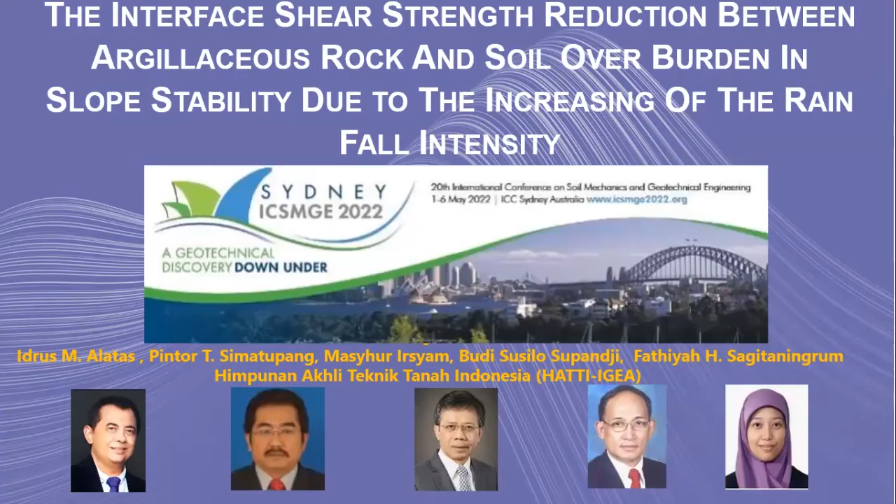Hello, everyone. Thank you for giving us the opportunity to deliver a presentation with the title The Interface Shear Strength Reduction Between Argillaceous Rock and Soil Overburden in Slope Stability due to the Increasing of the Rainfall Intensity. This paper was prepared by Dr. Idrus, Dr. Pintor Simatupang, Professor Masyhur Irsyam, Professor Budi Susilo Supandji, and Fathiyah.

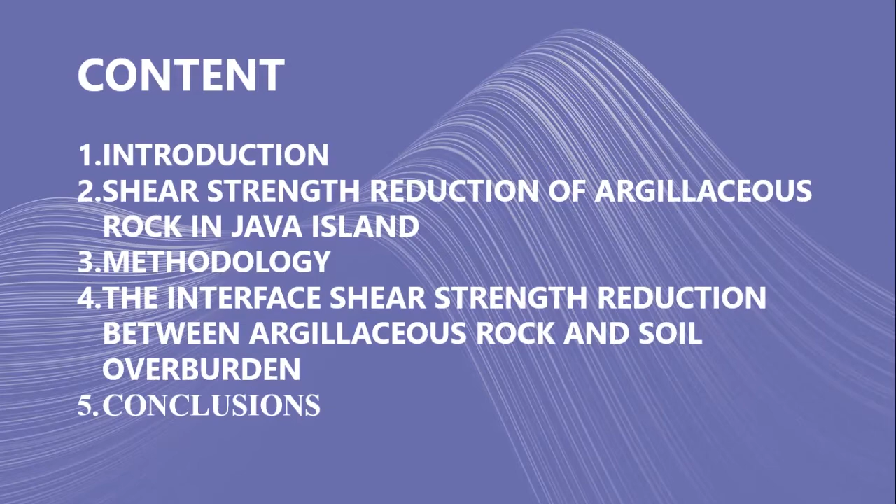The content of this presentation is divided into 5 parts, as seen on the screen, from 1 until 5, the conclusion. This paper is motivated by several landslide cases a few years ago in the argillaceous rock or clay shale area on the island of Java. This includes a landslide on the Semarang-Bawen Toll Road project, a landslide in the Sport Education Center area in Hambalang, Sentul, West Java, and the last landslide at the beginning of the pandemic in the Cariu area, Jonggol, West Java, 2020.

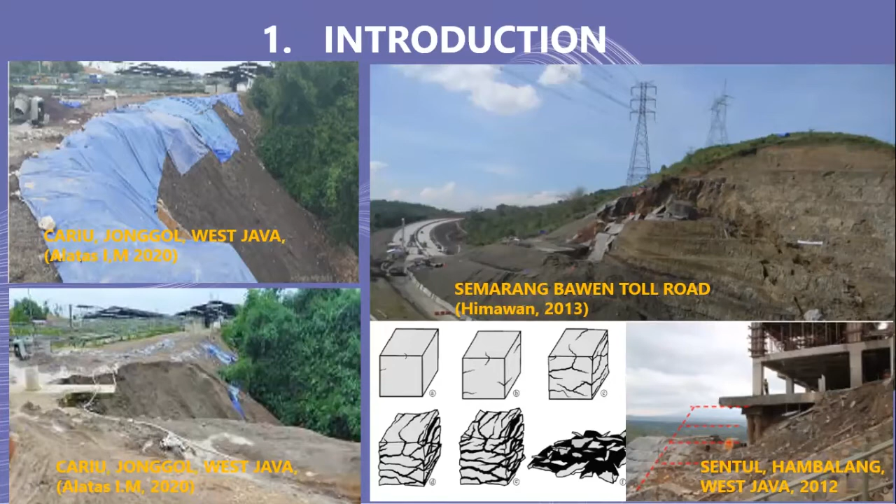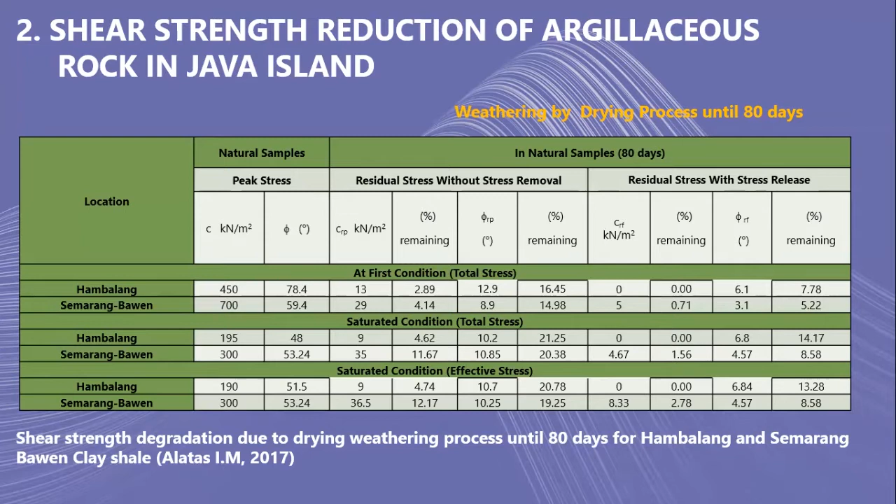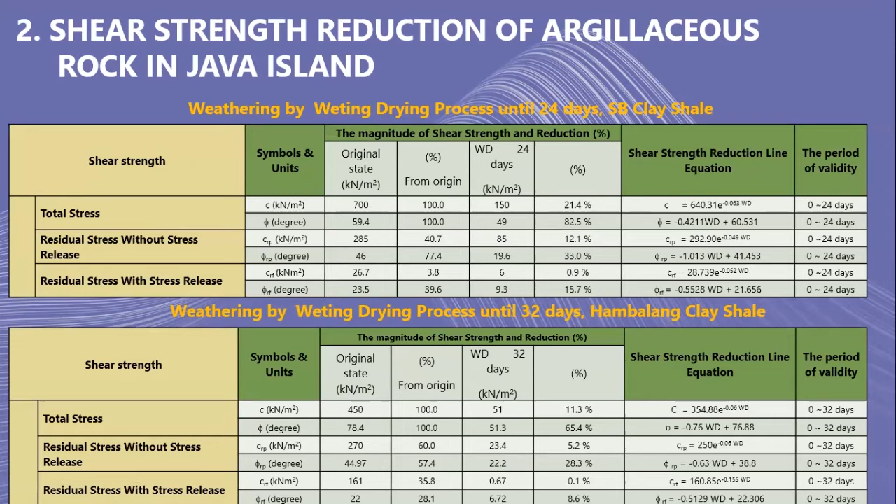Previously, we investigated the degradation of shear strength of clay shale due to the weathering process with wetting and drying on 2 argillaceous rocks or clay shales in Java Island, namely Semarang-Bawen clay shale and Hambalang clay shale. The table shows the degradation of the shear strength of the clay shale due to the wetting drying process, where the durability of the Semarang-Bawen clay shale samples was destroyed on day 24, while the Hambalang clay shale was destroyed on day 32.

The research we did in 2015 showed the cohesion dropped to 32% of the initial cohesion of fresh samples on day 80 due to the drying process.

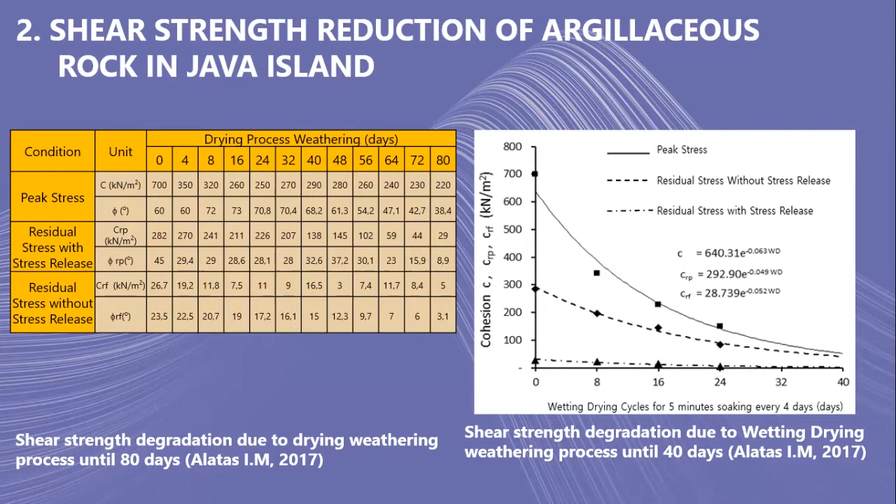The interface shear strength in this research is the interface shear strength between compacted weathered clay shale as the overburden layer and fresh clay shale. The shear strength of this interface will decrease or be degraded due to the increase of the water content and the reduced density in the compacted weathered clay shale, starting at its optimum water content until it reaches 100% degree of saturation. The addition of water content to the compacted weathered clay shale is carried out as a model for increasing rainfall quantity.

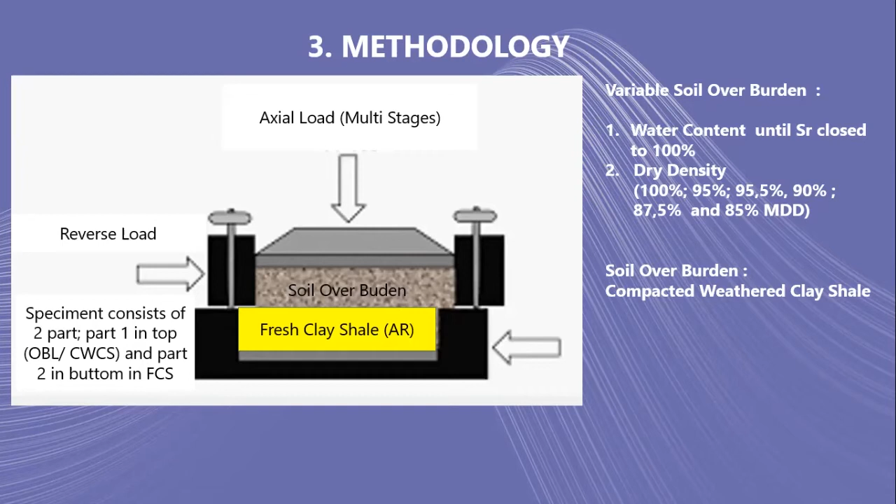The schematic methodology in the laboratory can be seen in the following figures. Step 1, the multi-stage shear test with 3 different normal stresses with direct load from left to right. Step 2, normal stress release. And step 3, multi-stage shear test with 3 different normal stresses with direct load from right to left.

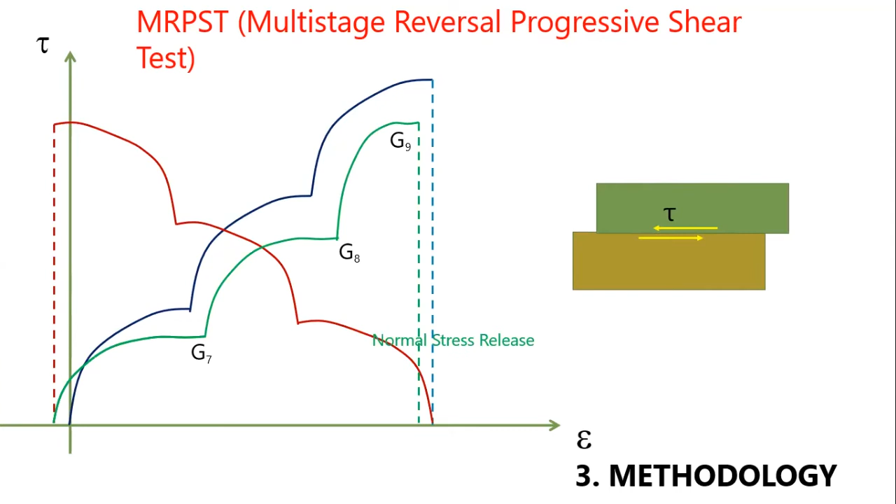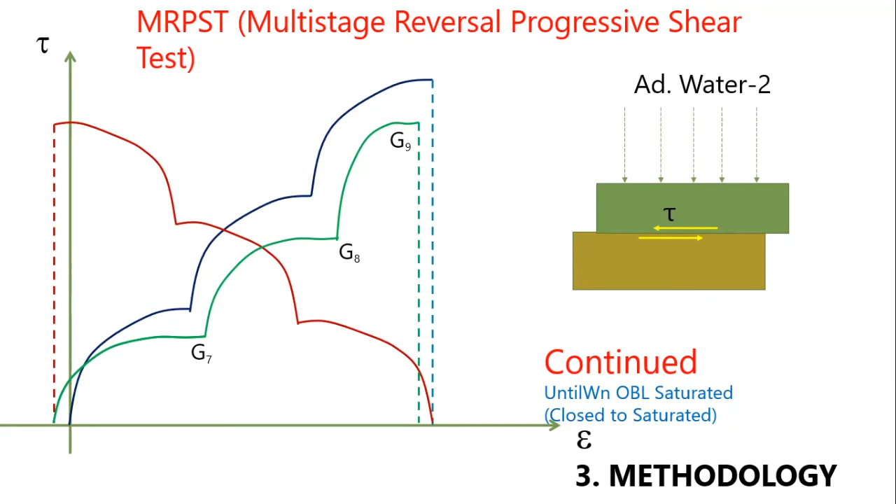Continue to step 4, normal stress release. Step 5, add water content number 1 to the compacted weathered clay shale, and continue with step 6, multi-stage shear test with 3 different normal stresses with load from left to right. Step 7, normal stress release. And step 8, add water content number 2 to the compacted weathered clay shale, and continue these steps until the degree of saturation of the compacted weathered clay shale is close to fully saturated.

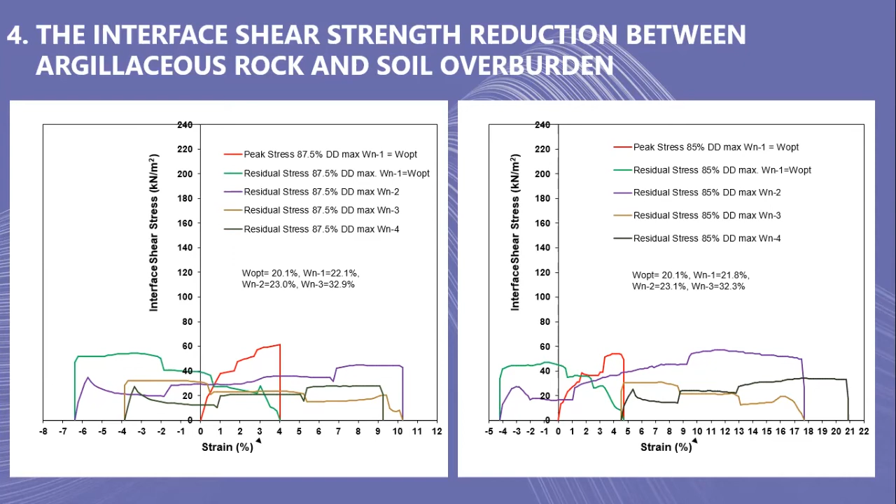The same thing also happened as the density decreased again to 87.5% and 85% of maximum density. In this multi-stage direct shear reversal, the stress strain is decreasing. The illustration of the decrease in density against the decrease in shear strength parameters, cohesion and internal friction angle, shows that the effect of the compacted weathered clay shale density level is more dominant than the increase in water content on changes in the interface shear strength parameters.

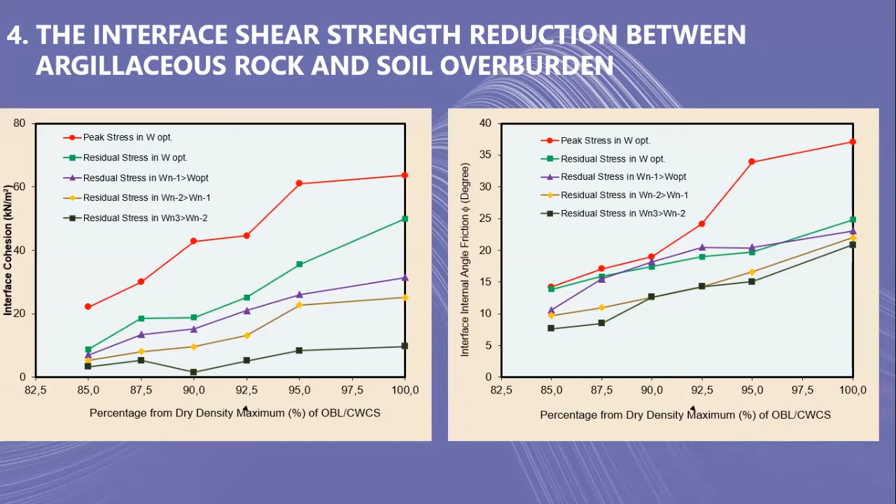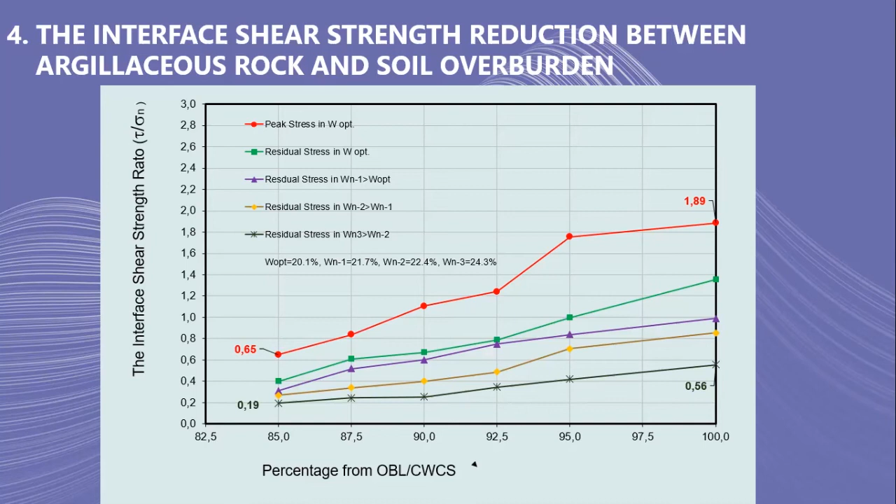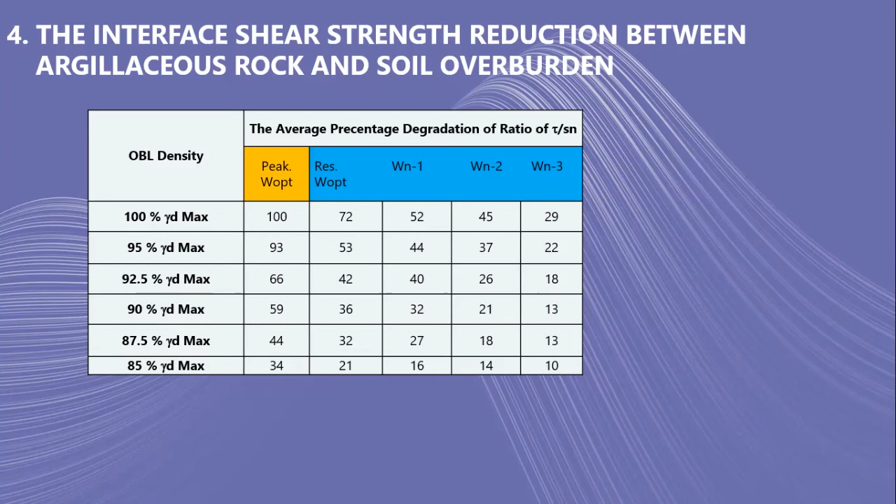The shear strength ratio, obtained by dividing the shear stress by normal stress, already represents cohesion as well as internal friction angle. The effect of density is greater on the decrease in the interface ratio compared to the water content. This table shows that the average remaining interface shear strength ratio at 100% maximum density is 29% at 100% degree of saturation, and at 85% maximum density is 10% at 100% degree of saturation. The compacted weathered clay shale density is very important to the decrease in interface shear strength.

In conclusion, the interface shear strength between argillaceous rock and compacted weathered argillaceous rock is strongly influenced by the density of the compacted weathered clay shale and its water content. At 100% maximum dry density, the interface shear strength ratio is a maximum of 1.89 at the optimum moisture content. This shear strength ratio will drop to 0.56, or remain at 29%, due to the increase in water content until fully saturated.

Considering the effect of density at the compaction water content, the interface shear strength ratio decreases until it remains 34% at 85% density of the compacted weathered clay shale, and remains 10% when fully saturated.